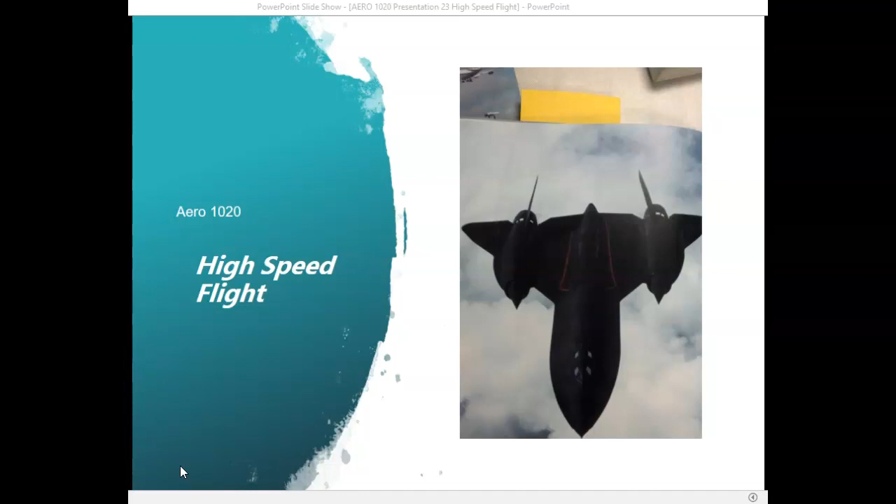Welcome back to AERO 1020, Theory of Flight, presentation number 23 on high-speed flight. This presentation will include an overview of air compressibility as it applies to the speed of sound, the definition of Mach number and critical Mach number, and shock waves and how they develop and the consequences. We'll also discuss wave drag, critical drag Mach number, and swept wings.

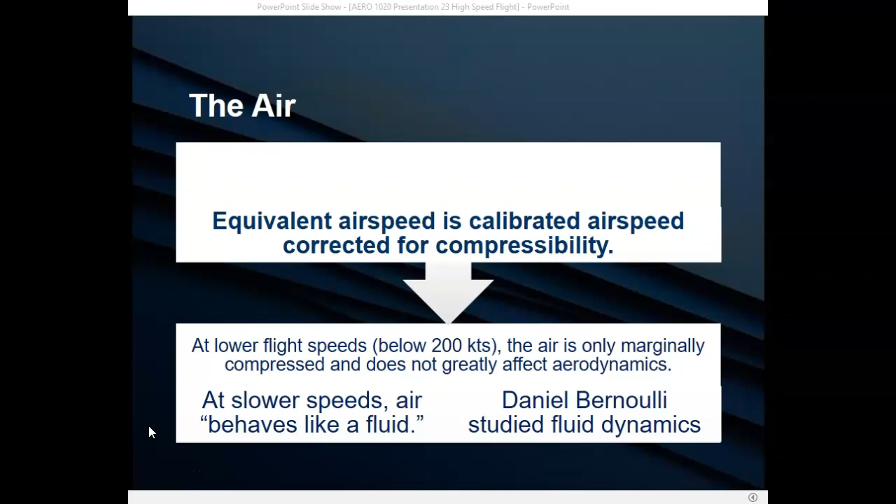Remember the presentation about the different types of airspeed and equivalent airspeed and how it really didn't apply to the aircraft that we're flying at this point in our careers because they can't fly at greater than 200 knots. And compressibility only applies to aircraft that can fly at high speeds of over 200 knots. Under 200 knots, the air is only marginally compressed. It doesn't really greatly affect aerodynamics. And at slower airspeeds, air behaves like a fluid. And as you may remember, Daniel Bernoulli studied fluid dynamics.

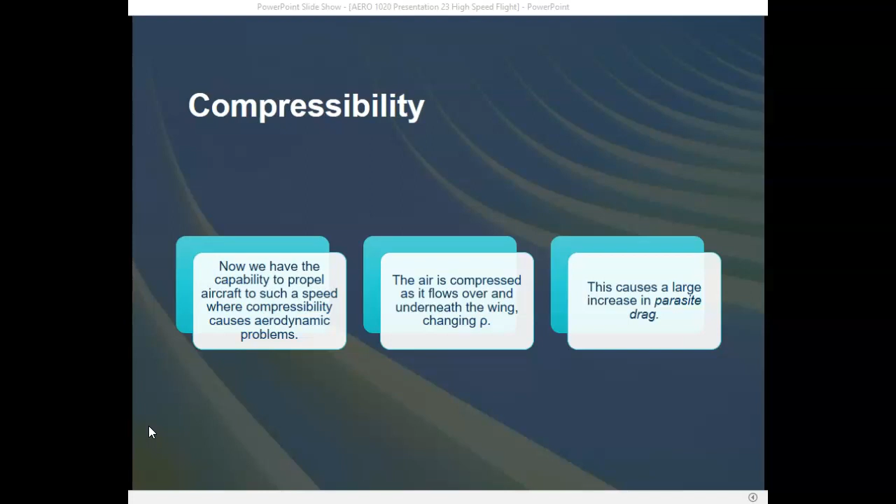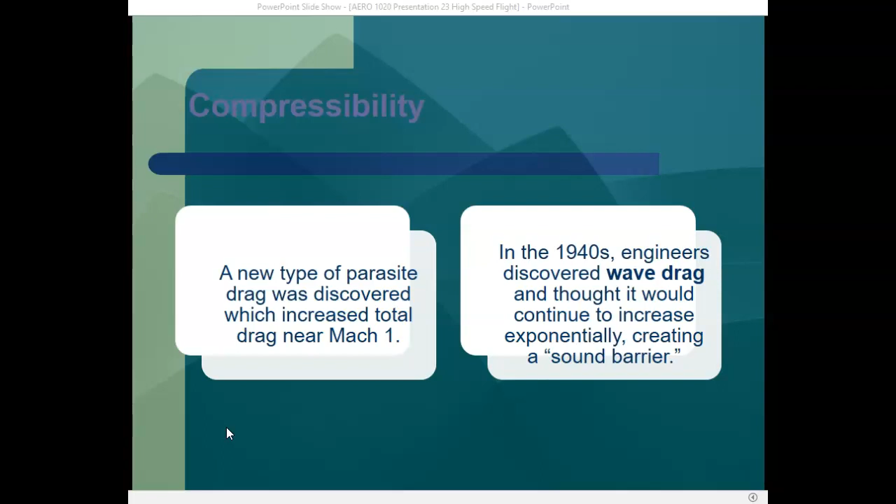Once we have the capability to fly at high speeds of over 200 knots, compressibility causes some problems. Air is compressed as it flows over and under the wing, which changes density, or rho, and this causes a large increase in parasite drag. In the 1940s, engineers discovered wave drag, and wave drag is a new type of parasite drag which was discovered to increase total drag when you are near Mach 1. Mach 1 is the speed of sound. It was thought that it would increase exponentially, which would create a sound barrier. However, that turned out to be untrue.

Even back in the 40s, there were already man-made aircraft that could travel faster than the speed of sound. The Bell X-1 was piloted by Chuck Yeager and was the first aircraft to exceed the speed of sound in level flight. That flight occurred on October 14, 1947.

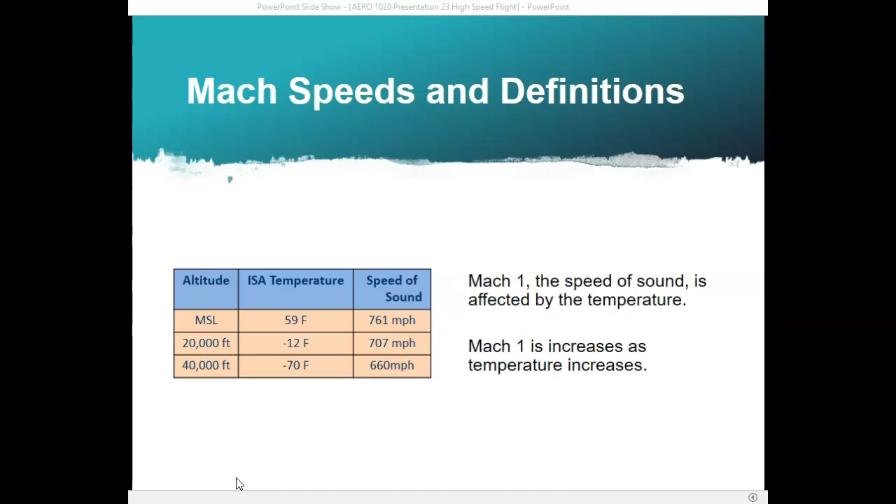As you can see in this table, at sea level and 59 degrees Fahrenheit, which is standard temperature for sea level, the speed of sound is 761 miles per hour. At 20,000 feet, at minus 12 degrees Fahrenheit, the speed of sound goes down to 707 miles per hour. And at 40,000 feet, at minus 70 degrees Fahrenheit, the speed of sound is actually over 100 miles per hour less than the speed of sound at sea level. At 40,000 feet and minus 70 degrees Fahrenheit, the speed of sound is 660 miles per hour.

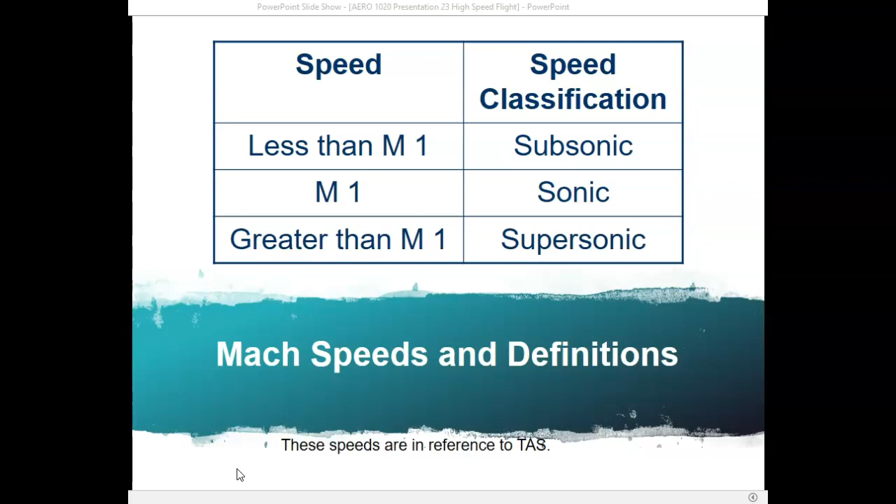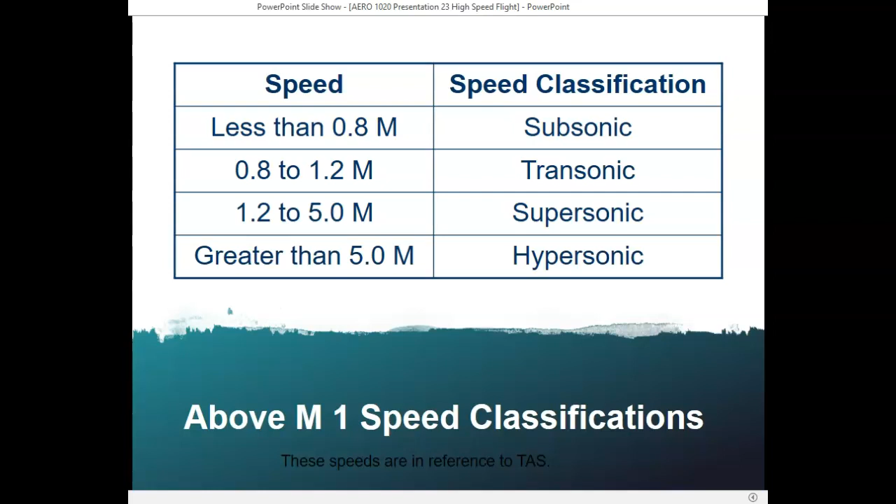There are three broad classifications for the speed of sound. Speeds of less than Mach 1, or less than the speed of sound, are known as subsonic. Mach 1, or the speed of sound, is known as sonic, and greater than Mach 1 is supersonic. We can refine the classifications even further to subsonic, transonic, supersonic, and hypersonic. Speeds of less than 0.8 Mach are subsonic. From 0.8 to 1.2 Mach is transonic, and from 1.2 to 5.0 Mach is supersonic. Any airspeed greater than 5.0 Mach is known as hypersonic.

The difference between subsonic speeds and sonic and supersonic speeds is that air can get out of the way from in front of the airfoil when it's traveling through the air at subsonic speeds. The pressure disturbance can be transmitted ahead of the wing, which actually prepares it to go over and under the wing. In sonic and supersonic flight, because the air no longer has time to move out of the way in front of the airfoil, we have shock waves.

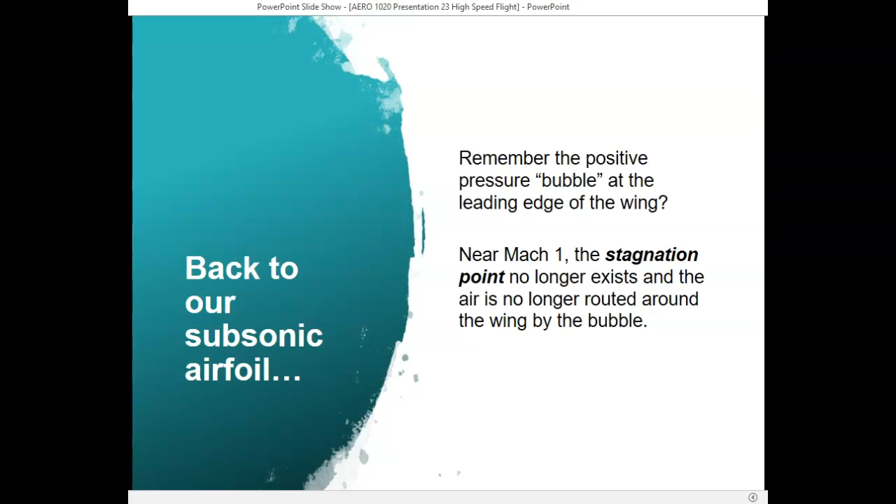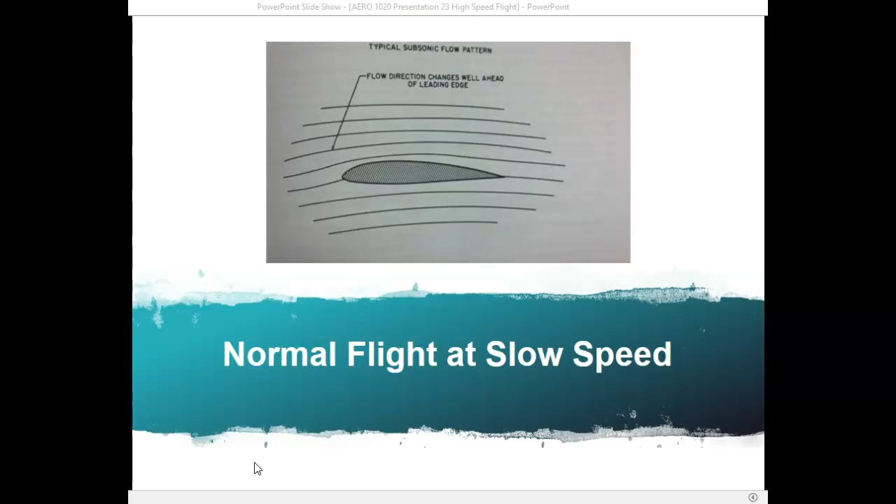So how do shock waves develop? Well, to understand this, let's go back to subsonic flight. Remember the positive pressure bubble at the leading edge of the wing called the stagnation point? Well, near Mach 1, the stagnation point no longer exists, and the air is no longer routed around the top and the lower surface of the wings by the bubble. Here's a figure showing an airfoil at subsonic speeds, and you can see that the direction of flow of the air actually changes before it even gets to the airfoil.

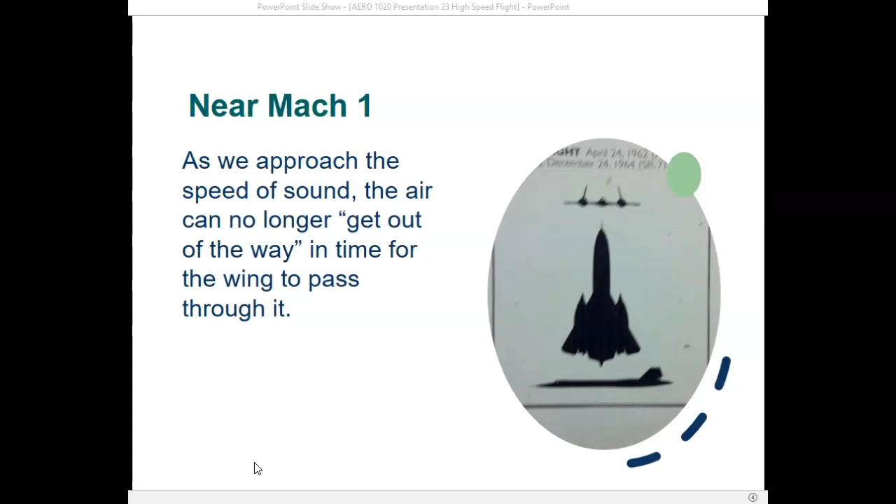As an aircraft approaches Mach 1, or the speed of sound, the air no longer has time to get out of the way before the wing passes through it. So pressure disturbances at subsonic flow can travel in all directions, but when you're at or above Mach 1, they can't go forward anymore. The aircraft is going too fast.

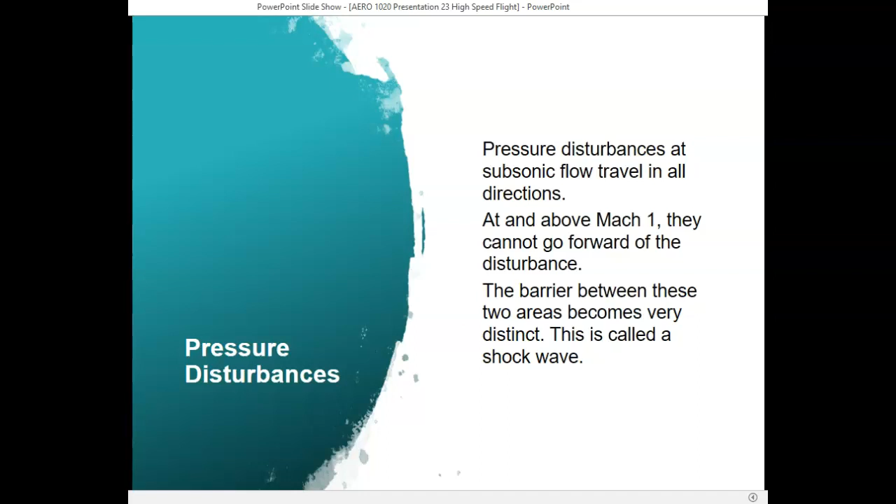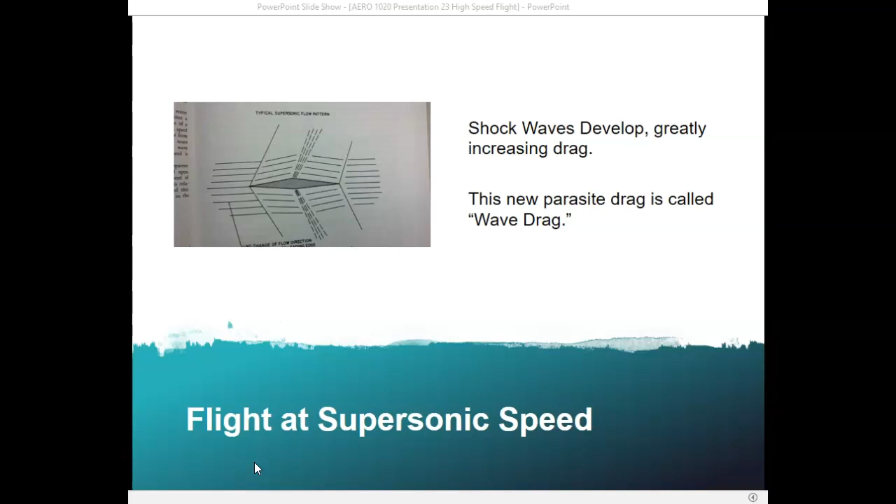The barrier between subsonic flow and supersonic or sonic flow gets very distinct, and it's called a shock wave. When shock waves begin to develop, they greatly increase drag. This drag is a new parasite drag called wave drag. Another important term to define is critical Mach number.

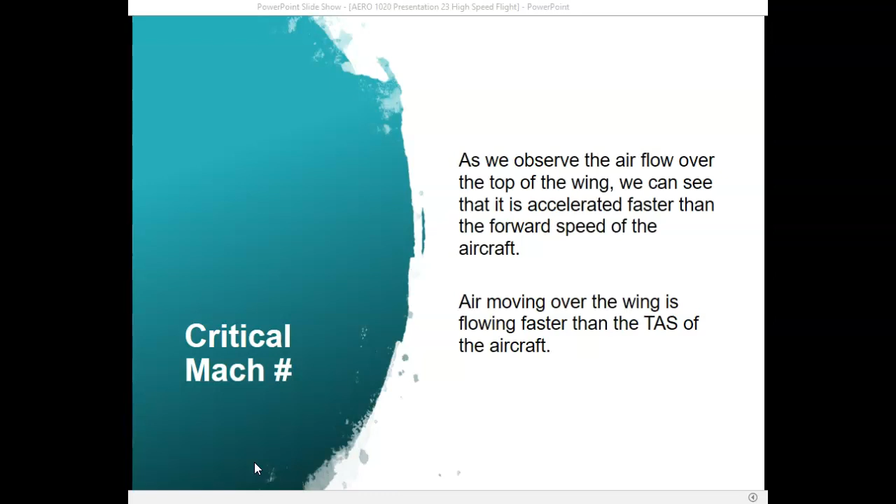If you observe the flow of air over an airfoil, you know that the speed of the flow is accelerated faster than the forward speed of the aircraft. So the air moving over the wing is actually flowing faster than the true airspeed of the aircraft. At or above a certain true airspeed known as the critical Mach number, a certain segment of the air over the wing is traveling at supersonic speeds.

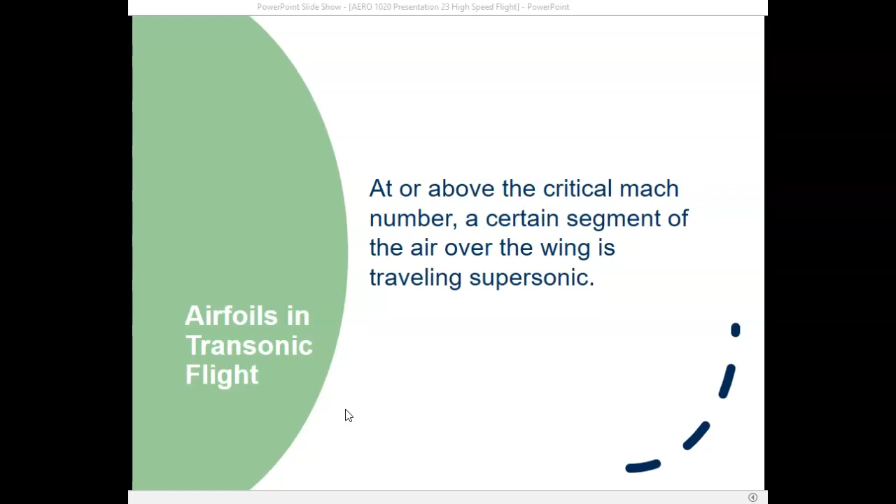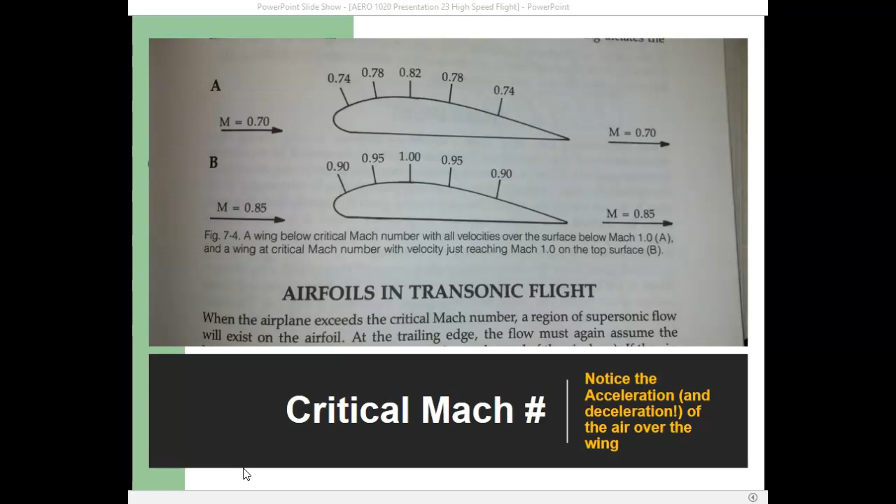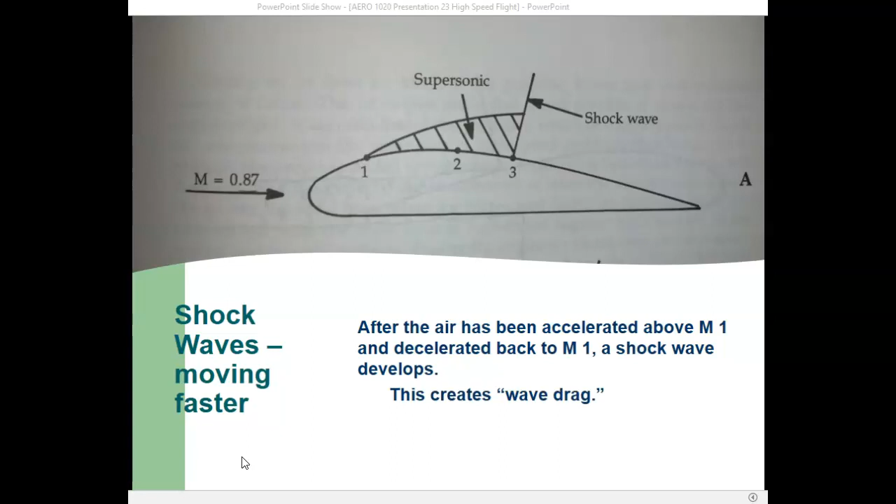Notice the velocity of the air flowing over the wing actually slows down after it reaches Mach 1 near the trailing edge of the airfoil. When the flow of air over the airfoil is accelerated above Mach 1 and then decelerated back below Mach 1, a shock wave develops, and this shock wave creates what's called wave drag.

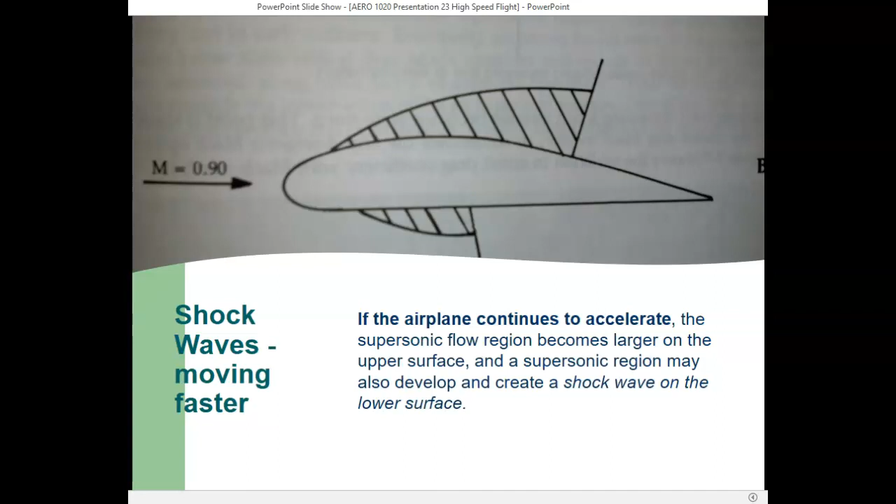As the aircraft continues to accelerate toward Mach 1, the supersonic flow region becomes larger on the upper surface, and you can even get a shock wave forming on the lower surface of the wing. As the aircraft gets closer to Mach 1, both of the shock waves move aft toward the trailing edge of the wing, and both surfaces, upper and lower surfaces, experience supersonic airflow.

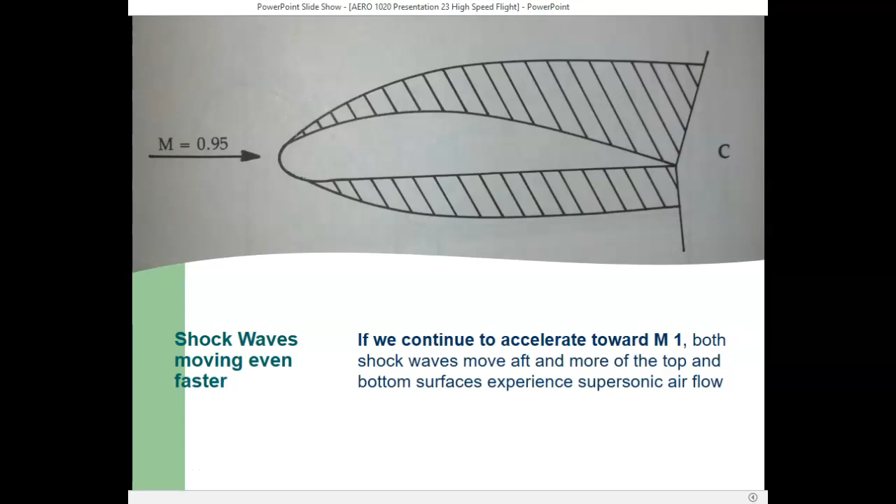When the aircraft reaches speeds of greater than Mach 1, a shock wave actually appears ahead of the airfoil, and this is called a bow wave. These shock waves create additional drag known as wave drag, and wave drag removes kinetic energy from the air.

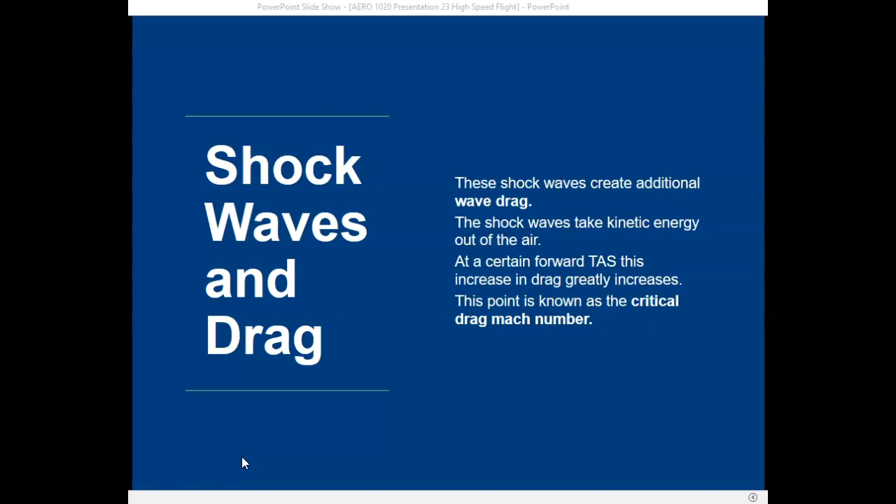Now, reaching the speed of sound, or Mach 1, requires a huge amount of thrust. Propeller planes are limited by the speed of the propeller tips, so a pure turbojet aircraft or a rocket-propelled aircraft is required to achieve supersonic flight.

Now, we can mitigate the effects of wave drag by sweeping the wings back on a supersonic aircraft. The swept wing creates more span-wise flow of air instead of chord-wise flow, and that slows down the speed of acceleration over the top of the airfoil. Since we slow down the chord-wise flow of air over a swept wing, the lift generated is less than the lift generated by a straight wing.

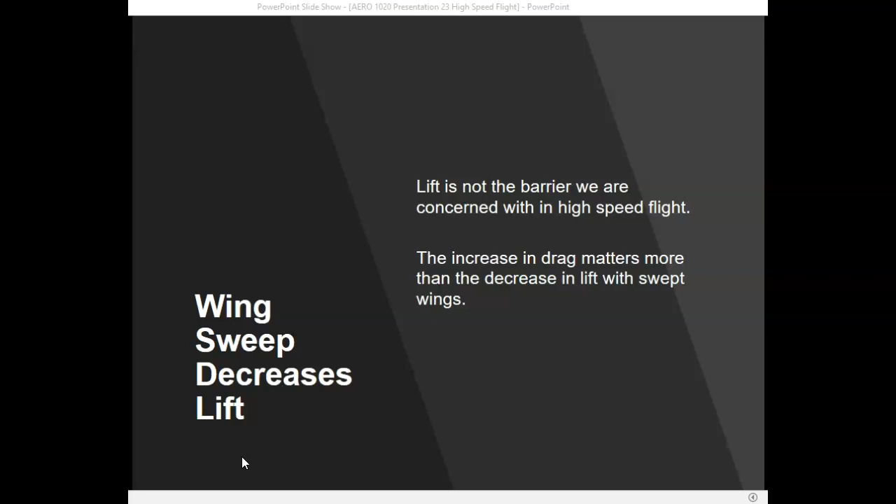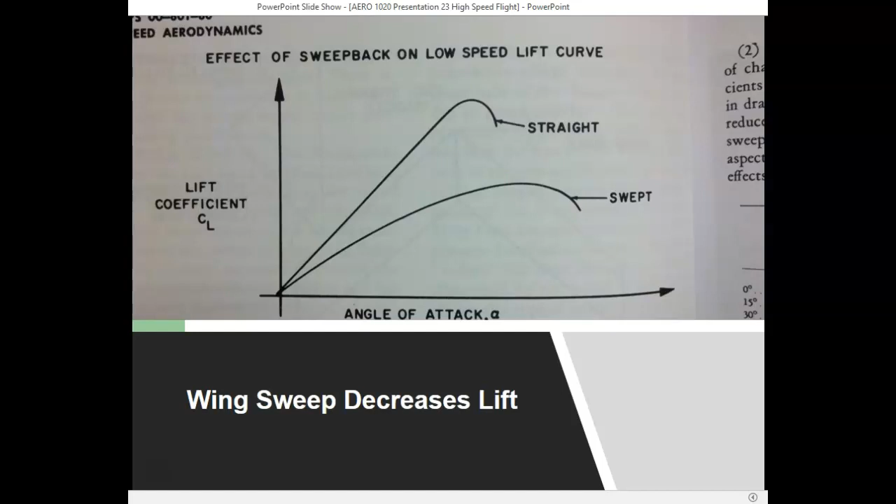So when designing a glider, would you use a swept wing or a straight wing? If your objective is to design an aircraft that will maximize lift and minimize drag, you would use a straight wing rather than a swept wing.